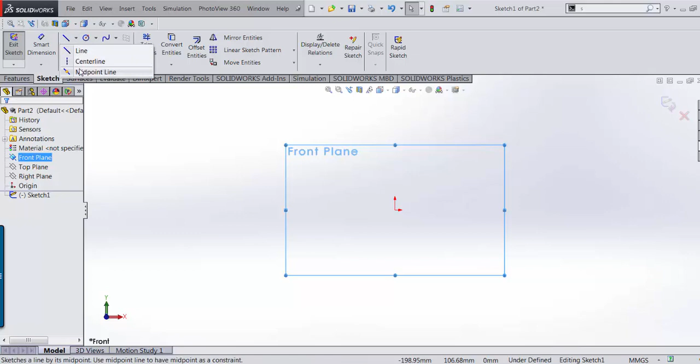To start the drawing, File, New, Part, OK. So on the front plane, draw a sketch, and I'll start with a midpoint line, drawing the following shape.

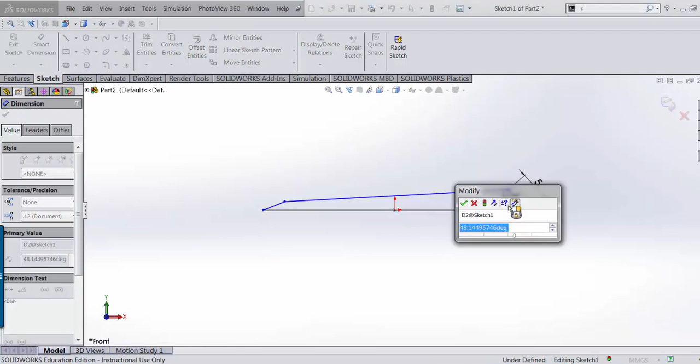Now adding a few measurements: five millimeters, with the angle 60 degrees, 105 length, and I'll give this angle here 45 degrees.

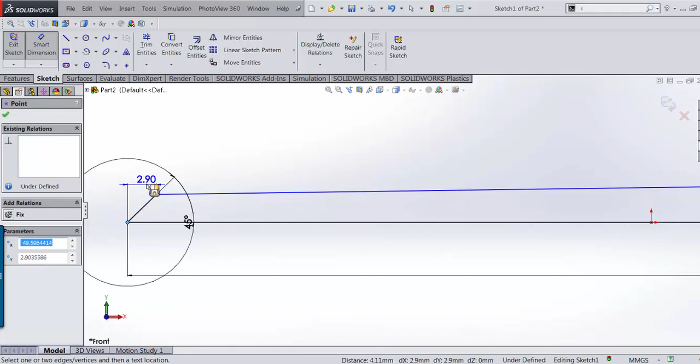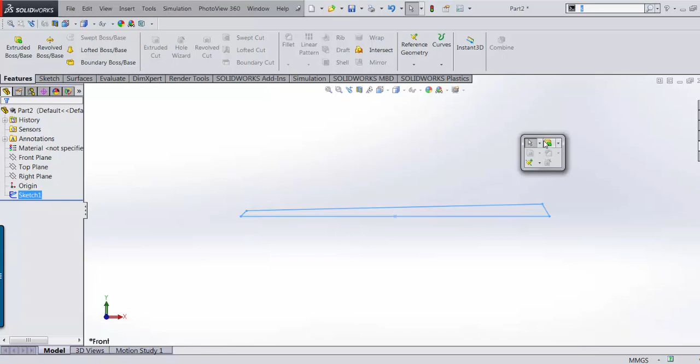And the measurement from here 2.9 millimeters. So the sketch now is fully defined. Accept the sketch, and in the features commands we'll extrude, by a length of 105 and mid plane.

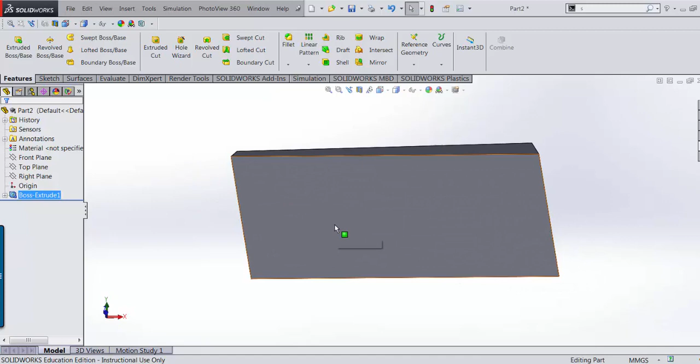So that's the outline of the base for the minute. On the undersurface we draw another sketch, and we will start with a centre line going through the origin.

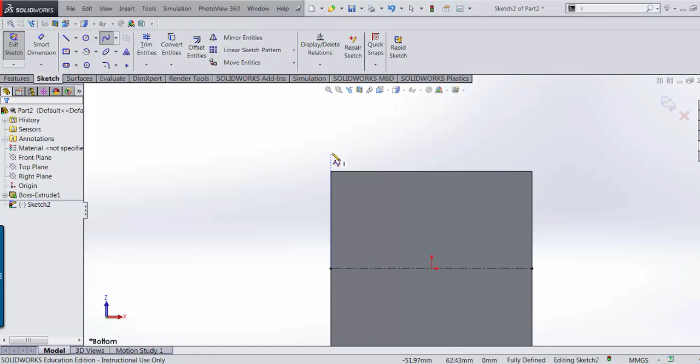The sides of the spatula are curved, so to draw that curve we will use the style spline, and I will start the style spline off away from my main drawing, and I will give it 5 points. So I click on 5 points there, and you can see the spline drawn there.

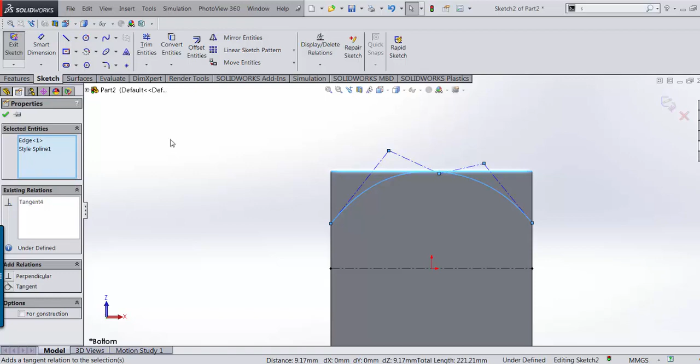Now I will drag these points down into position, and as you can see here, you can see the relation being added. Dragging the points down, now I will give a tangent relation between the curve and the end as shown. So there's a tangent relation there, and we can see here we still have a certain amount of movement, so we can still modify our curve.

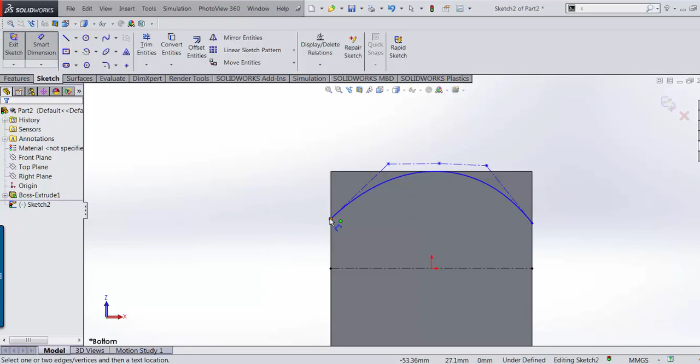And now I will add a few measurements, selecting the S key to get the commands up, Smart Dimension, and the measurement here of 35 millimeters. And this end, 27.

And I will just give it a few extra measurements: 35 from the origin to the fourth point, and once again I'll give 35 millimeters, the distance from the origin to the second point.

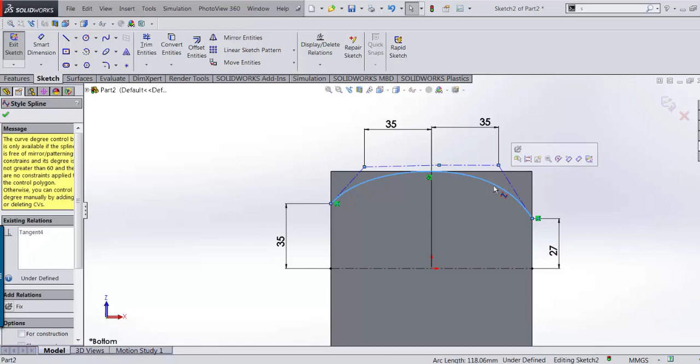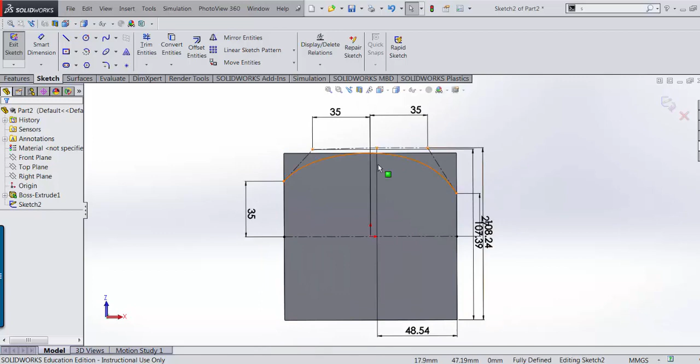Now, a certain degree of movement, and I'm happy enough with that curve, so selecting the curve, right click and fully define the sketch. Selected entities, that is the style spline, calculate, and so we can see now the sketch is fully defined.

Accepting the sketch, going to extrude cut, and accept through all. And now the curve on the side of the spatula is created on the top face there.

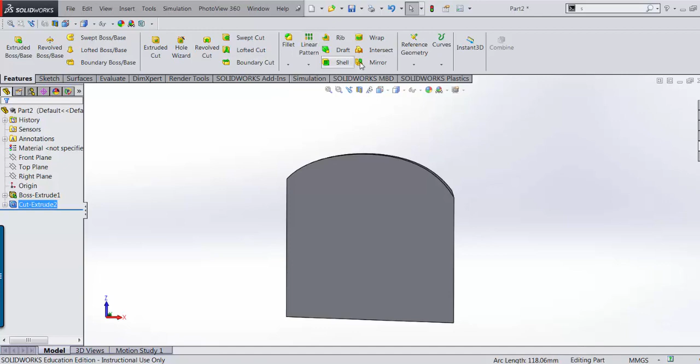Now to mirror, we need to mirror that about the front plane to create the curve on the other side. And there now we have the base part started. The next thing that we have to do is the stem.

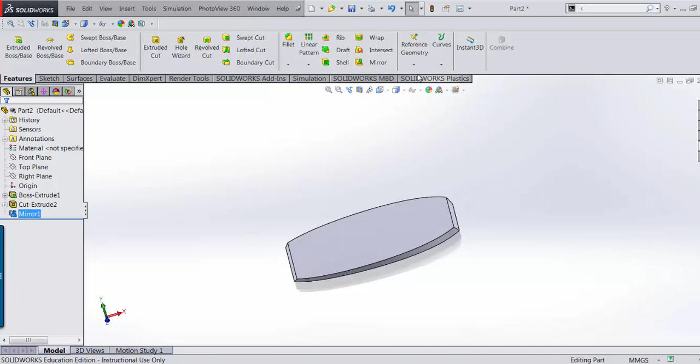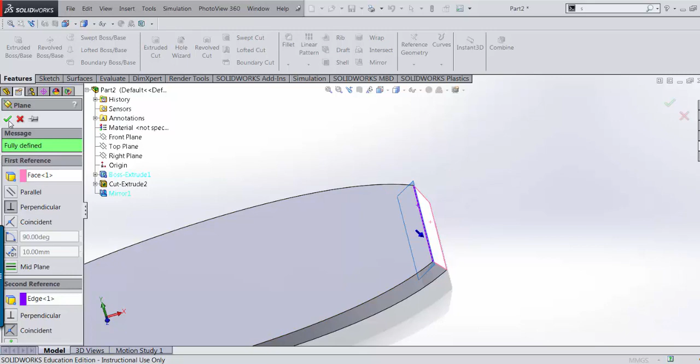So to draw the stem, I need to create a plane, and I will select this face, and I need the plane to be touching this top edge here, and it needs to be perpendicular, and as you can see here now that it is perpendicular. So accepting that, so there's plane 1 now created.

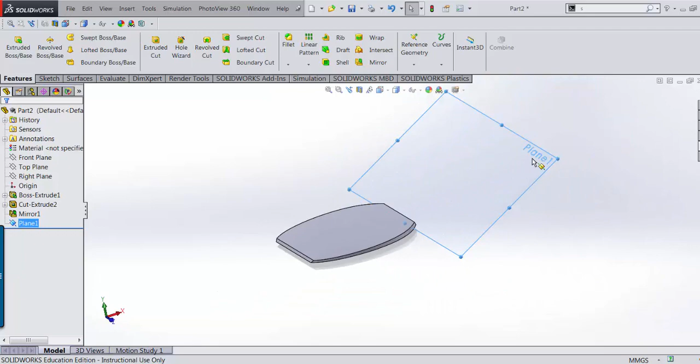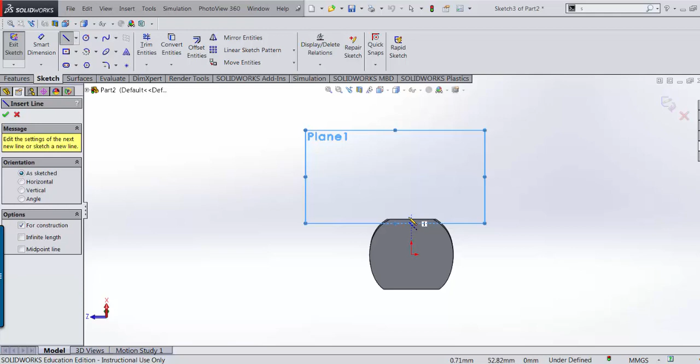So drawing a sketch on plane 1, normal to, and we can see here we're drawing it on the back there. And once again we're starting with the center line, and now we draw a line, and we add a few measurements.

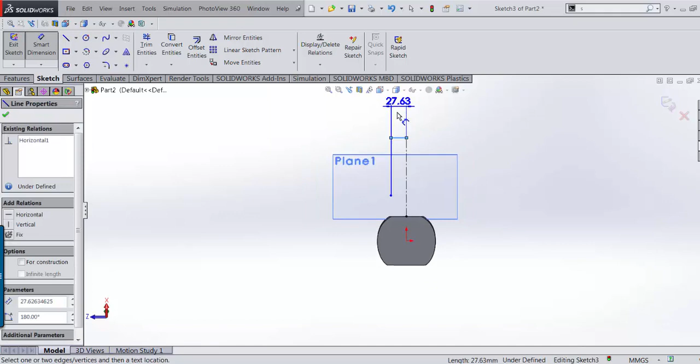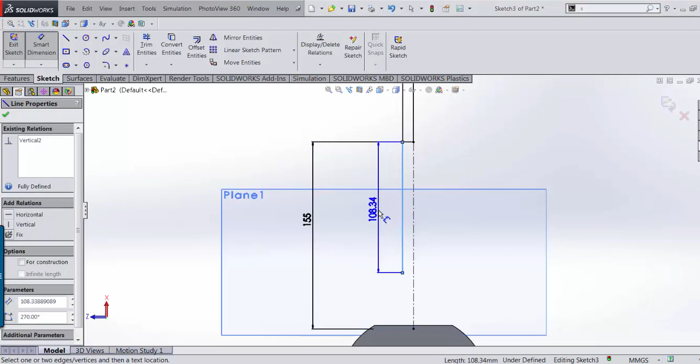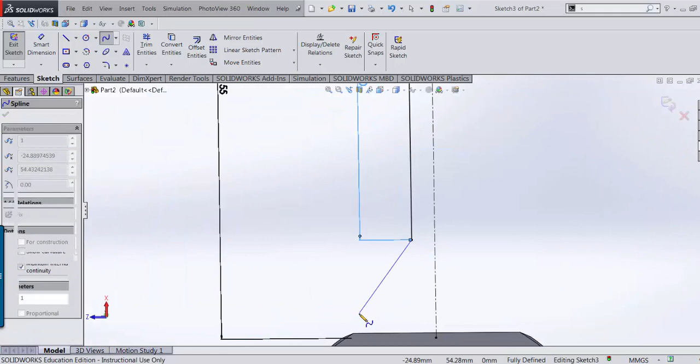Now the next thing we need is we need a spline, joining that point with this point, and then looking at it from an angle we can see clearly the points in question.

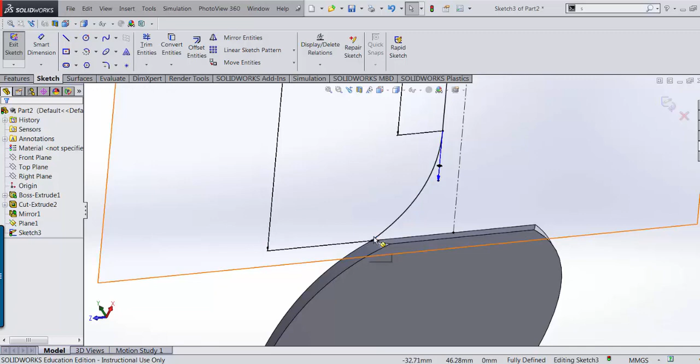So now adding a tangent relation between the spline and the line. Same again, tangent relation between the curve and the spline.

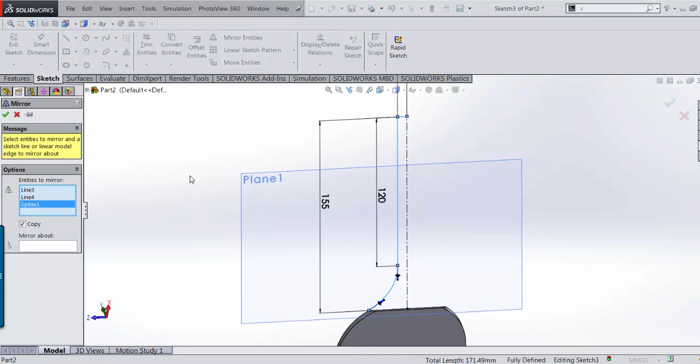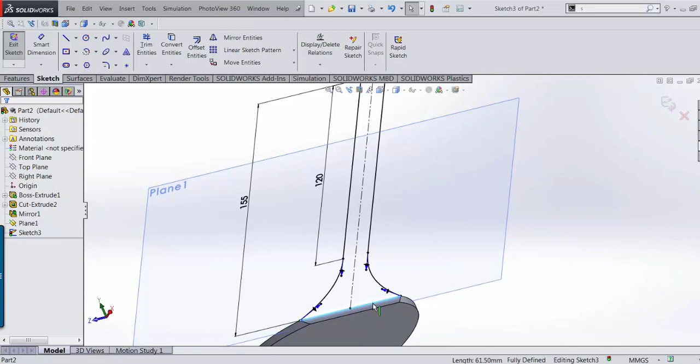So happy enough with that, we'll use the mirror entities to mirror the following: 2 lines and the spline, and we mirrored about the centre line. Now the sketch is almost complete, apart from closing it. We need to select the bottom edge here to close the sketch. So select that line and convert entities, and that closes that sketch.

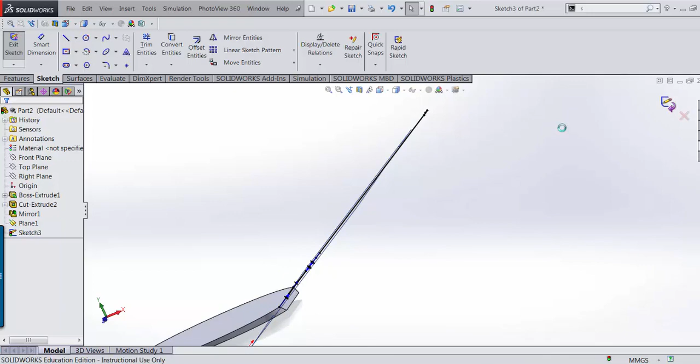So that sketch is drawn on plane 1. Now we need to draw another sketch similar to that on the underside. So accepting the sketch, we need to draw another plane parallel to plane 1, but going through the bottom edge. And it jumped to perpendicular, so we'll click back and make it parallel.

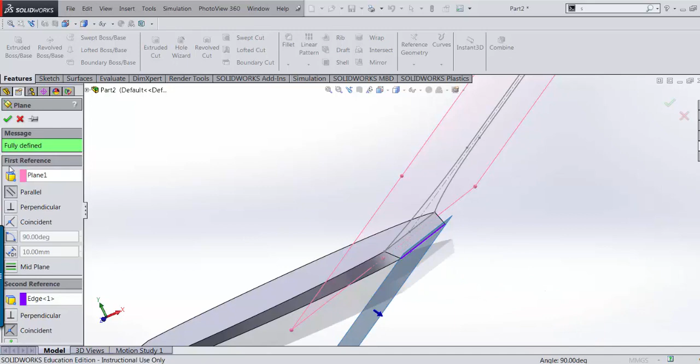So now when we have that plane 2 shown here, we will just hide plane 1 in case it interferes with our drawing.

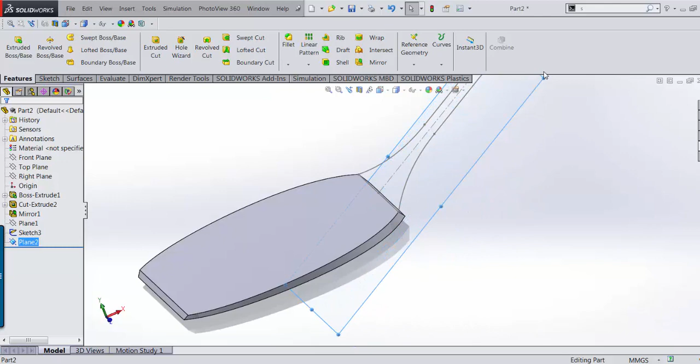So plane 2 is shown there. Once again, on plane 2, we're drawing the sketch.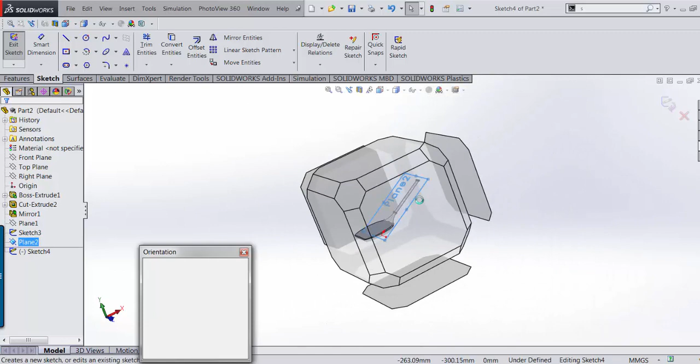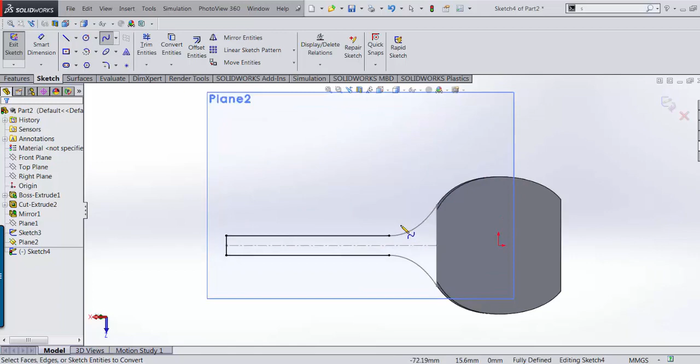And we can use convert entities to select the following lines to transfer those lines onto our new sketch. And then we select the spline, and we join the spline.

Be careful here to select the appropriate or the correct point. Spline again. And now, as before, a tangent relation.

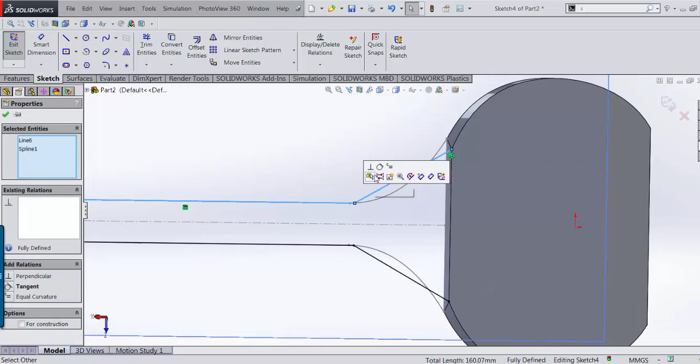And once again, a tangent relation between the curve and the spline also. And the same on this side. Tangent. Tangent. And to close the sketch, convert entities.

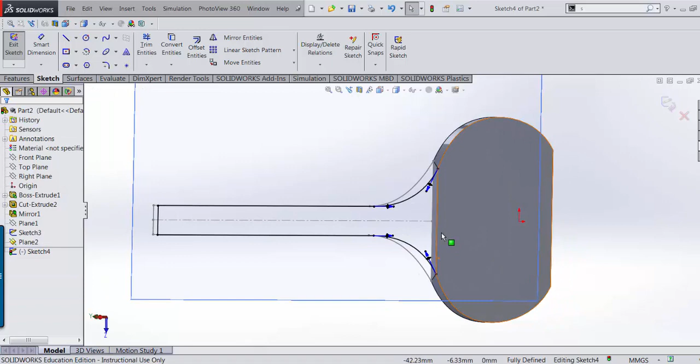So now we've got the sketch on both planes, plane 1 and plane 2. So I will hide that plane as well. Accept the sketch.

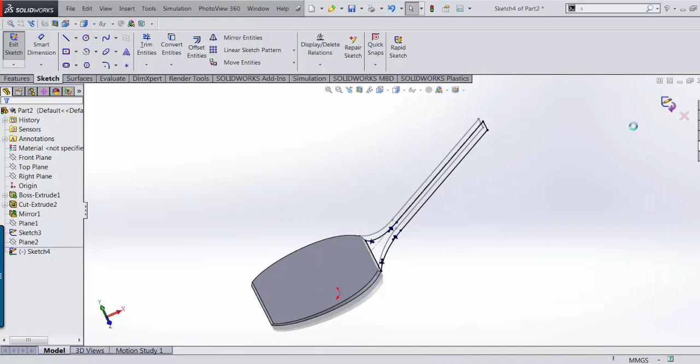And now we use boundary boss base and to fill in the handle. And there now is the stem attached to the base, and the handle will fit onto the stem later on.

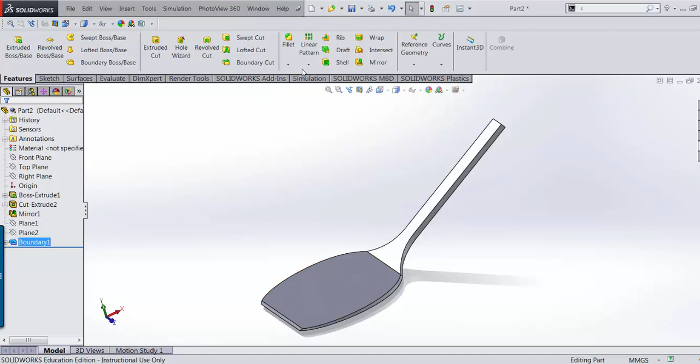So using fillets, first of all I will add a 2mm fillet to this edge.

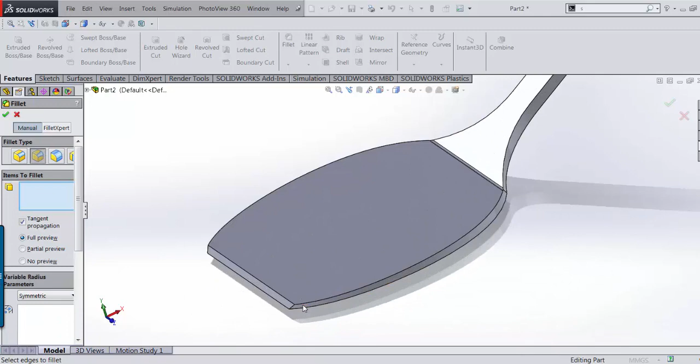Accept that. I will select fillets again, and this time I will add a variable fillet on this edge and the one shown there, and I will double click here and change this to 1mm at the front, and the same here. Double click, change that to 1mm as well.

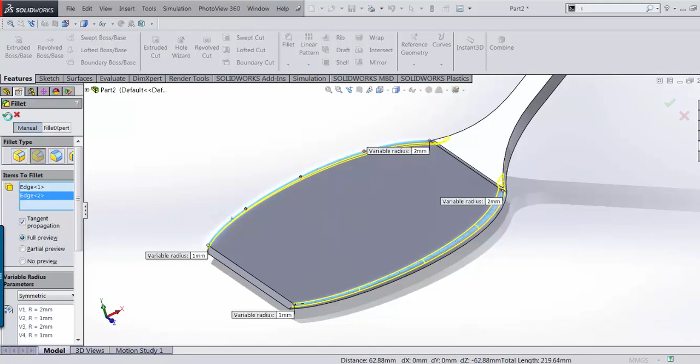So the variable fillets can be changed on the screen here. Accept that, and...

I suppose I can add another fillet, a 2mm fillet to the stem, the top face of the stem there and there.

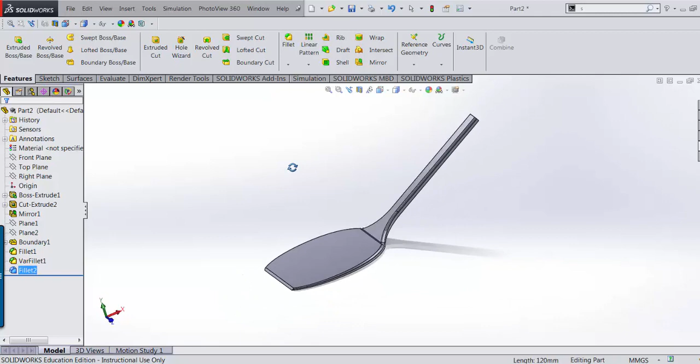Almost complete. So now we have to put in the slots. So on the underside again, draw another sketch. And once again I'll start off with a center line.

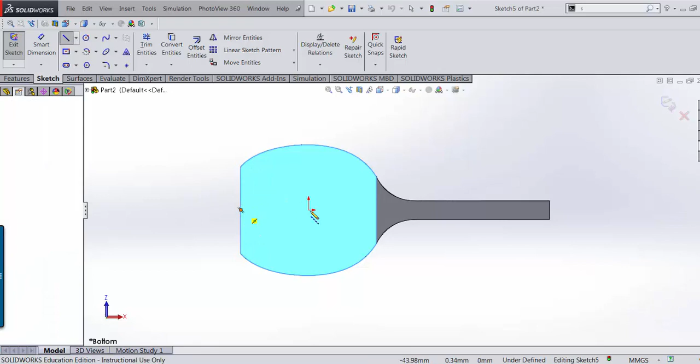And we will select the slot command. Now, looking at the slot command, we can see here there's two types of straight slots and two types of curved slots possible. So selecting the slots, now on the straight slots, point 1 to select the center of

the semicircle on the left, point 2 to select the center of the semicircle on the right, and point 3 will give you the width of the slot. Alternatively, if you want to select the center of the slot for point 1 and then point 2 for the position for the center of the curve and point 3 for the width.

But I'll go with the first one here. So point 1 selected anywhere there, left click for point 2 and click for point 3. Another slot, and I'll put in a third.

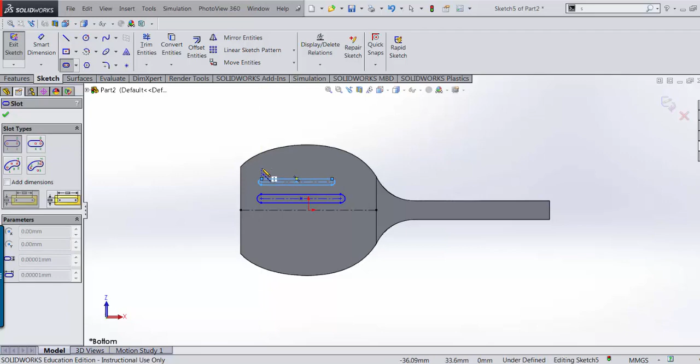So using the slot command, the slots are created very quickly. So adding a few relations, and I'm adding a vertical relation between those 3 point 1s.

And selecting the first 2 slots now, we can see here on the left hand side equal slots, so I'll make those 2 equal. That is equal in size and equal in length.

Accept that, and select the first one and the last one, and I will make them equal as in radius. So now if I drag out the second slot, the first slot maintains the same length.

Adding a few measurements. The distance from the slot to the center line, 3 millimeters. The radius of the slot, 2.5.

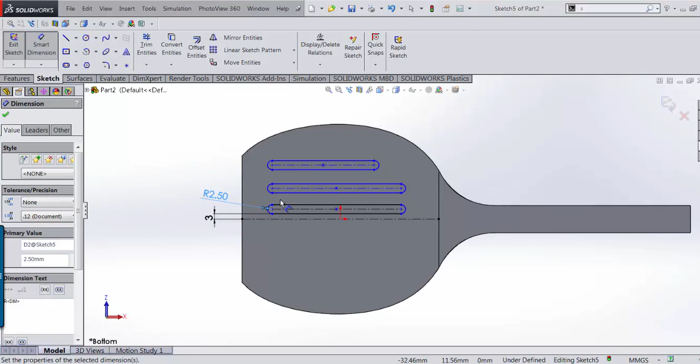The spacing between each slot, 6 millimeters. And the length, give it 68, and the one at the end, 58.

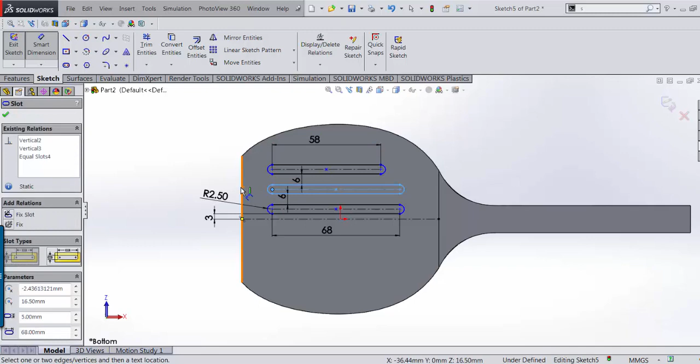Now the distance between the center of the slot and the end, we'll give that measurement 15 millimeters. So using mirror entities, we'll click on the first, second and third slot and mirror about the center line.

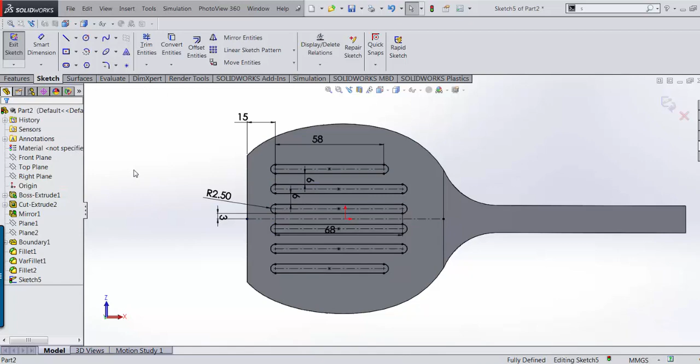The slots now are created on the underside. We'll accept that, extrude cut through all.

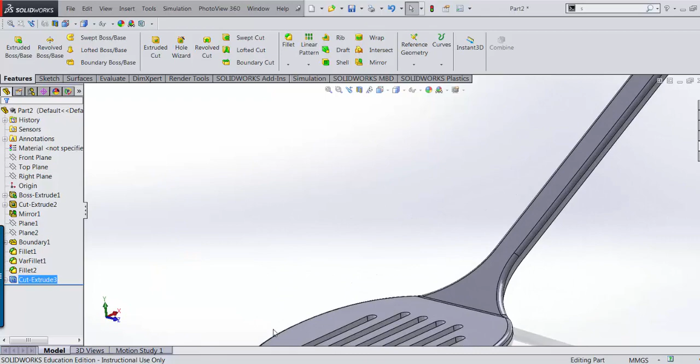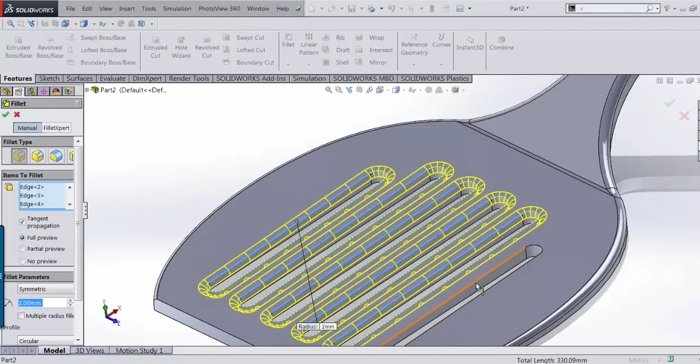So now we'll add a few fillets here, a 2 millimeter fillet. So on the first, clicking on the edge of the slots, zooming in here, and accept that.

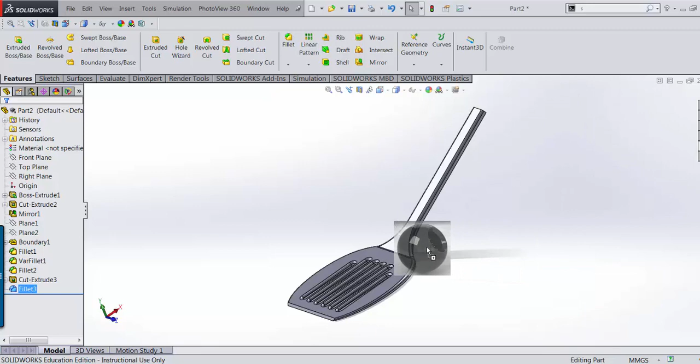So the only thing left to do is to give it an appearance, and we'll go with plastic, medium gloss, and there now is the spatula base created.